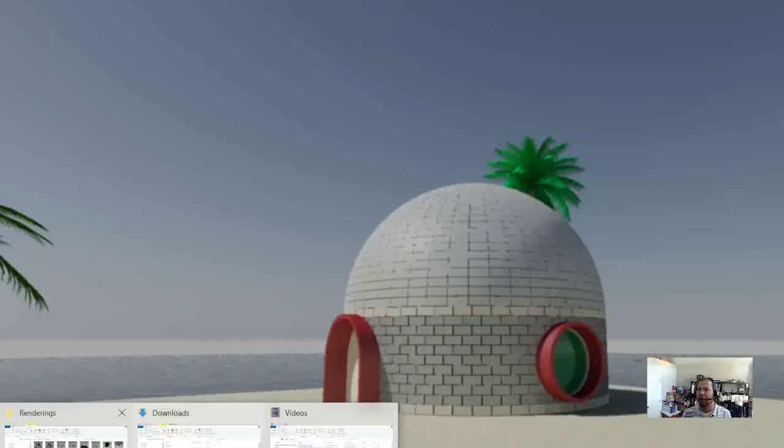heated or cooled air. It utilizes its environment to cool the inside when it's hot outside and warm the inside when it's cold outside. It uses the concept of convection through its design, which I will show you momentarily. First, to go into some of the reasoning why this is a good idea.

The shape of the dome, again, is among the strongest structures. Evidence for that is the shape of the human skull. The cranium is a dome structure which has evolved over millions of years to this shape because of its strength, durability, resilience, and ability to protect the inside.

This shape most likely evolved because of necessity through the millennia, and again, it is evidence, without going into too much detail, why this is an efficient shape when it comes to protection, when it comes to use of space, use of materials. It is the shape that uses the least material for the most amount of space for construction and living, dwelling.

And it is no surprise why it is all over nature. It is used throughout nature very many times, repeatedly. As we can see here, turtle shells also utilize the shape of a dome, again, for its protection, for its durability, and its strength to resist pressure from just about any angle.

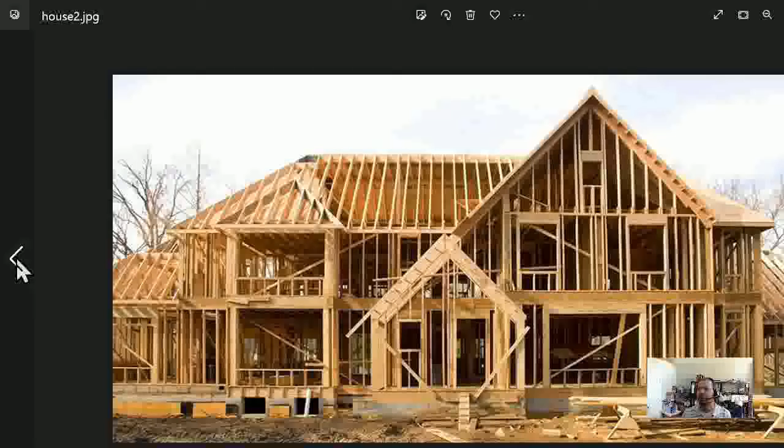And these shapes that you see here, this combination of shapes, are not the most resistant to pressures, and it is only a wonder why we so much use these shapes for home construction. The overwhelming amount of homes are constructed in these shapes and patterns.

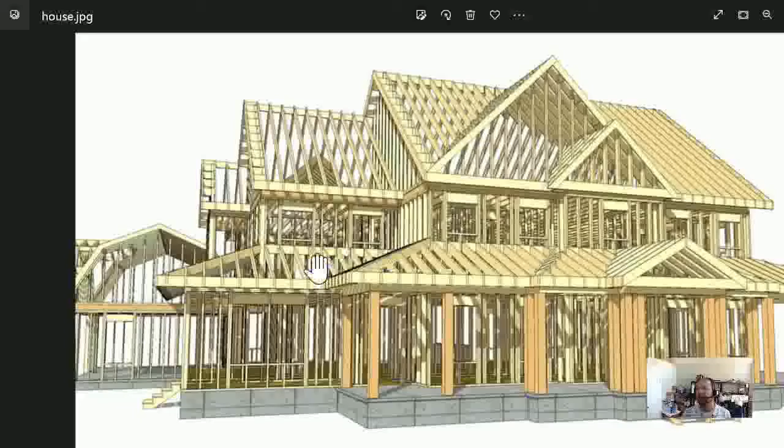And as you can see here, the amount of materials required to keep this frame erect and up is immense, and the cost for its construction reflects this amount of materials, time, and skill required. This is an example of a small frame for a conventional home. Again, even for a small home, you can see the large amount of materials required.

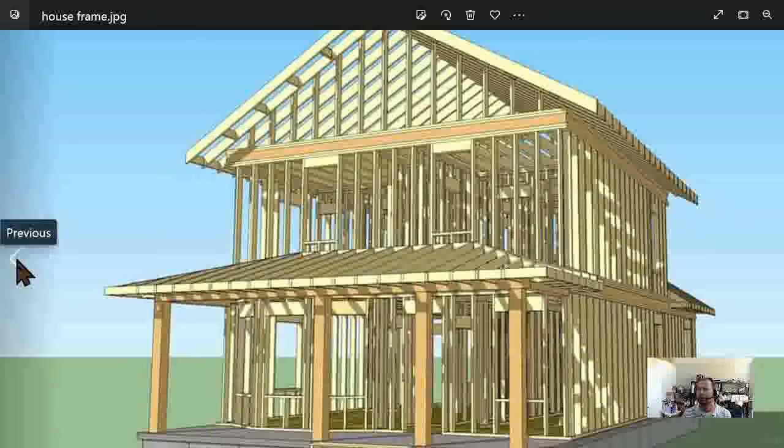A dome is a self-contained structure. It is a self-reliant structure, meaning that it stands on its own. It doesn't require internal columns or internal members to keep it up, to keep it in its shape. And that is why every hard hat is designed in such a way, using the dome shape, because of its ability to resist impacts and resist all kinds of pressures from just about all sides.

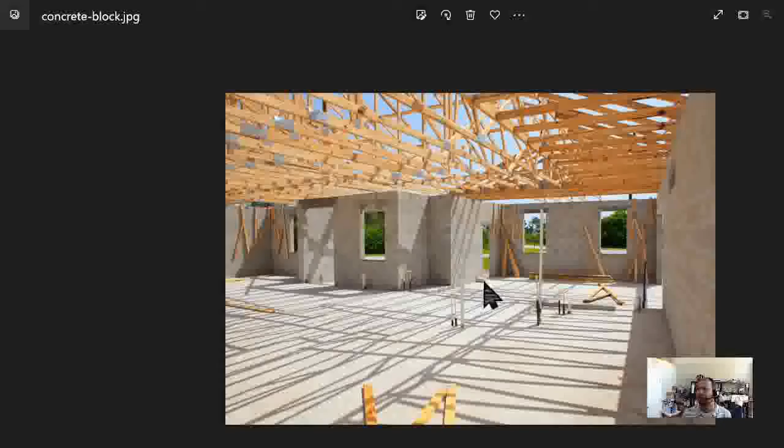This is again a conventional home construction. As you can see, it is using concrete blocks, and as you can see, the large amount of material used for the roof, because most roofs have to be in this shape for durability. Flat roofs are highly undesirable and expensive and require large amounts of steel members and trusses to keep them both from collapsing and straight without sag and stuff like that.

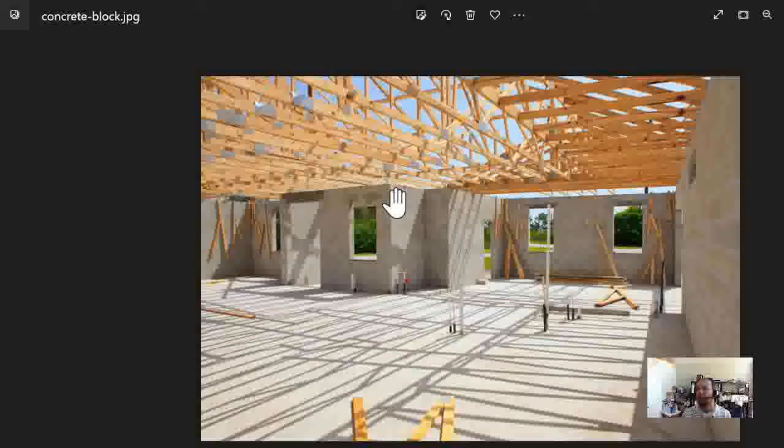So the large amount of triangles here are to keep the roof both straight and to keep it from collapsing. As you can see here, constructing even a small home like this one with concrete and blocks requires a large amount of not only skill and time, but materials as well.

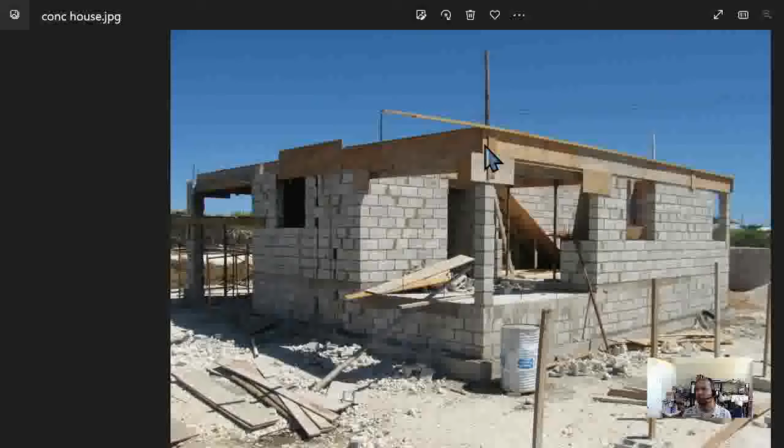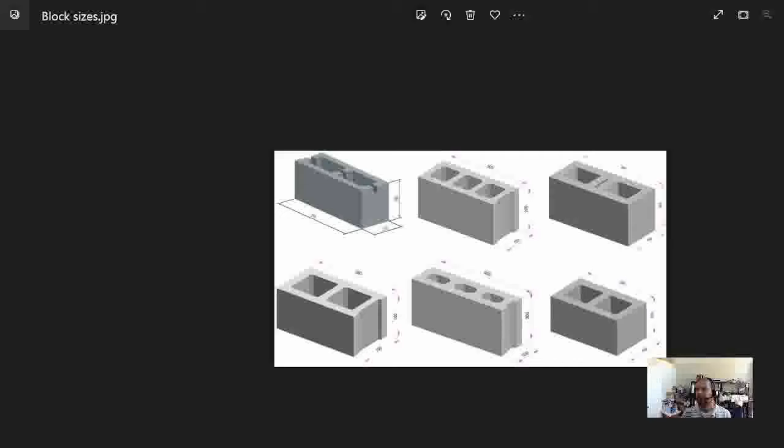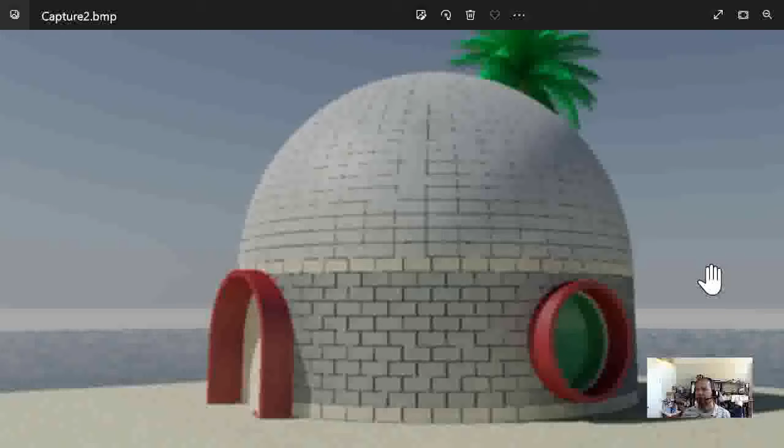These are the different block sizes. And again, the dome home is to be built with concrete, both poured and blocks. As you can see, it is a concrete block structure mainly, utilizing concrete block construction in a circular fashion with some poured concrete in some of its features like the door frame and window frames. And perhaps on the dome itself, there are some sections, as I have designed it, that will use poured concrete. This is a reinforced concrete or block concrete structure.

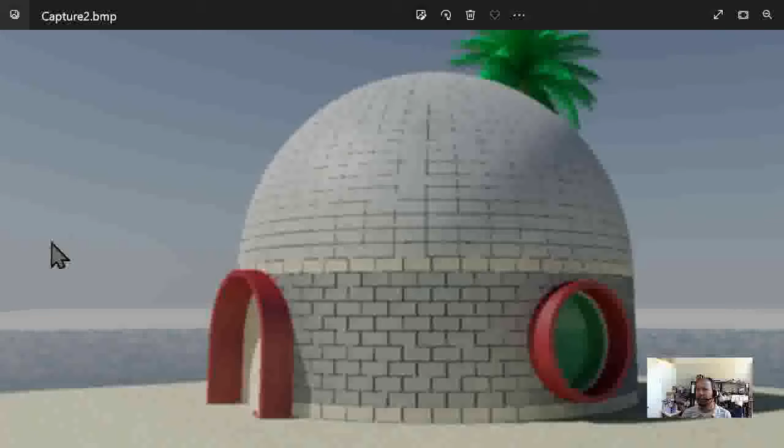It does utilize steel rebar or reinforcing bars of steel, but even those are a lot less than a conventional home would use. Again, this home does not require any interior supporting walls at all. If there are interior walls, they could be constructed of just about any other materials just for division, organization, or privacy. And with that, I will begin to show you the construction methods that I have come up with for the construction of this dome home.

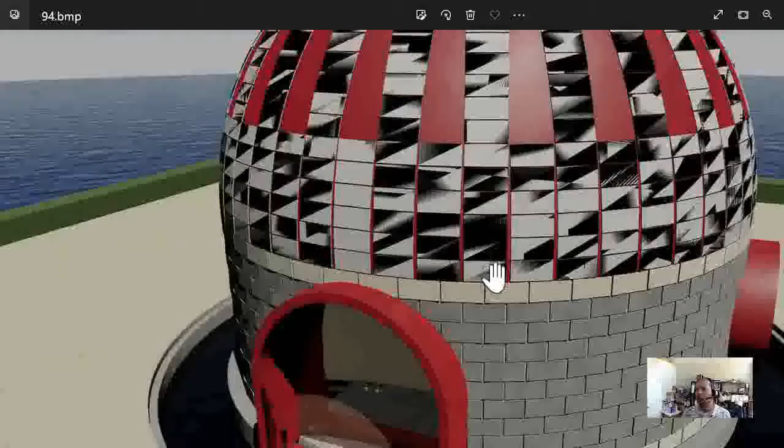Again, as you can see, it is designed to collect water. This is a water collection system, water reservoir system that I have come up with. Again, that will be collected through rainfall in this area. This is like a water reservoir pool, if you will, around the structure that will maintain water as long as it is not vaporized. And again, vaporization and exposure to radiation is a way to keep it clean. That is the radiation from the sun.

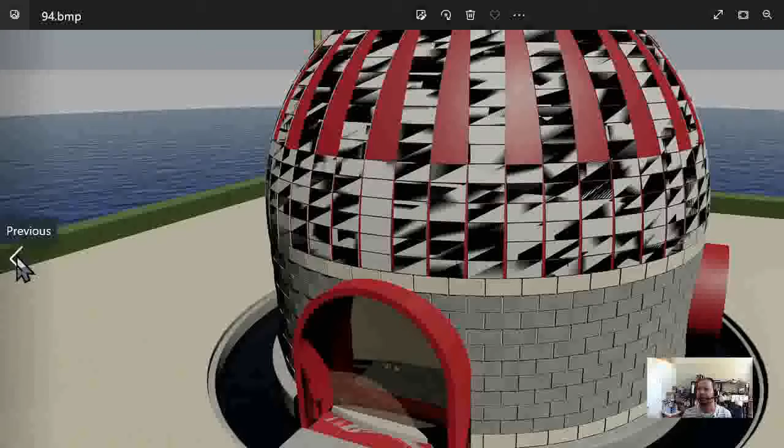This is another view of the concept of this dome home. As you can see, it is almost entirely built with concrete blocks. I have come up with this array, this circular array, that really does not require complex patterns of the blocks. This is a monolithic dome pattern for the structure. Monolithic domes have the advantage of simplicity, being a lot more simple than perhaps geodesic domes or other types of complex patterns.

For a dome, this is a pattern that keeps the arc patterns of each of these sections straight arcs, and as you can see, they don't reach all the way across because of the size of each block. These blocks are standard sized. I believe they are about 20 centimeters across, and they're all standard. All these blocks are the same size. And again, this is designed like that for simplicity. They are arranged exactly as they would be in real life.

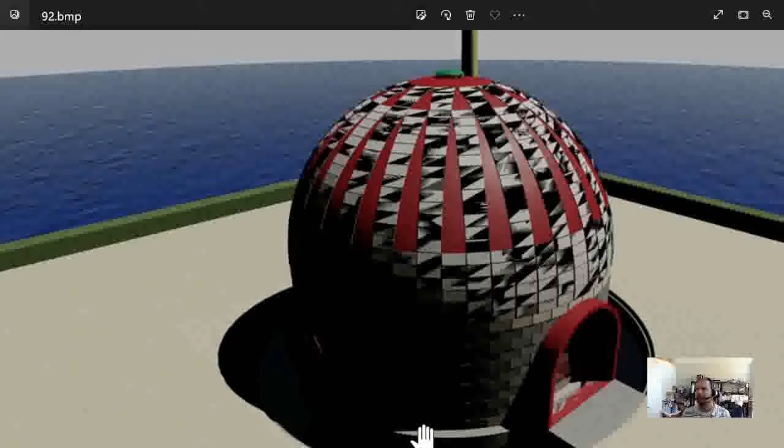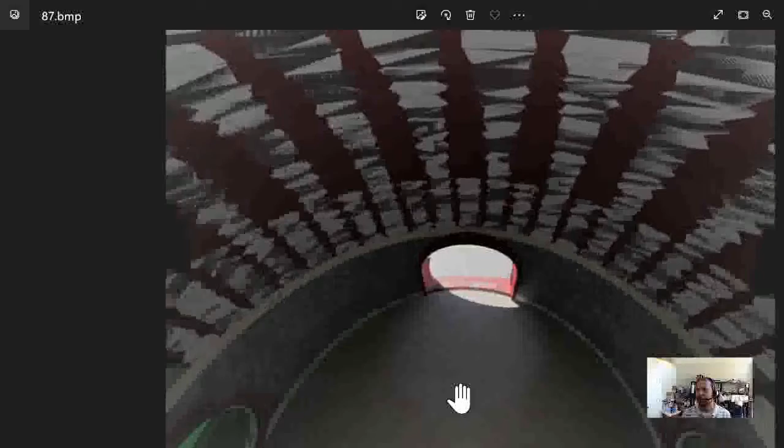This is another view of the structure. This is a view of the structure from the inside, as seen from the top inside, more or less a second level. This structure is designed to have the option to stack a second floor relatively easily with materials like steel or even wood. You can relatively easily build supporting walls and a second level here because it offers the height necessary for a second level.

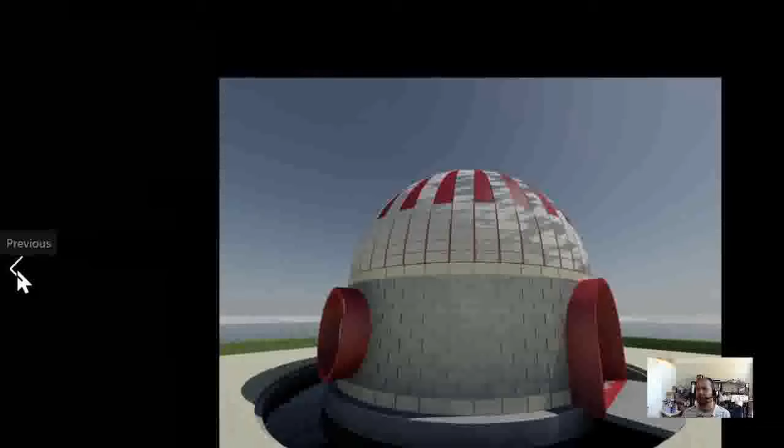And I will go into the details of the structure as I go along, as far as sizes, measurements, dimensions, etc. This is a rendering of the structure, quite nice rendering, and again showing the water reservoir. I designed the structure to have this water reservoir as optional. You can build it, of course, without it. You just will not have the capability to store water.

And I got away from using other materials such as in my other dome project because I realized that this is actually cheaper to build, stronger, simpler, and the materials for it are readily available in just about any part of the world. The materials are not exotic, not something that will be developed in the future, something that is conceptual or non-existent, something that's expensive.

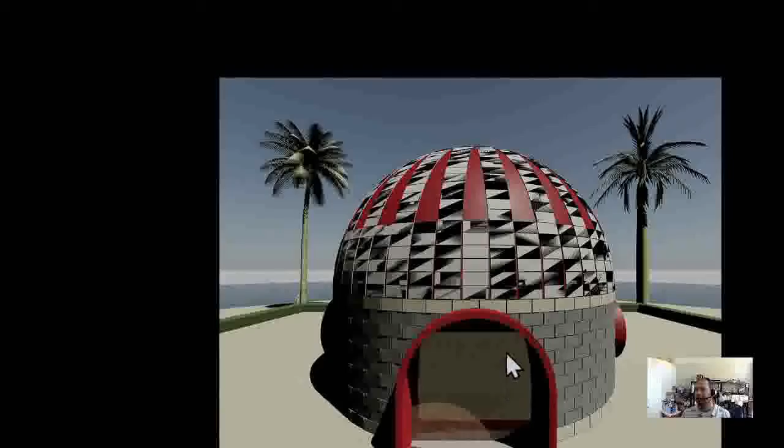This not necessarily has to be a pane. This could be window blinds made of materials such as, again, wood or aluminum or other kind of metal, like even steel. So it is a quite versatile design that could be changed and adjusted as the builder wishes.

This is a front view showing the very large arched doors. These doors are designed to be large on purpose for flexibility of bringing in materials, furniture, the flexibility of using the structure for just about any utility, such as even vehicle storage or any kind of other equipment storage. But it can easily be used for living as well, just as it is.

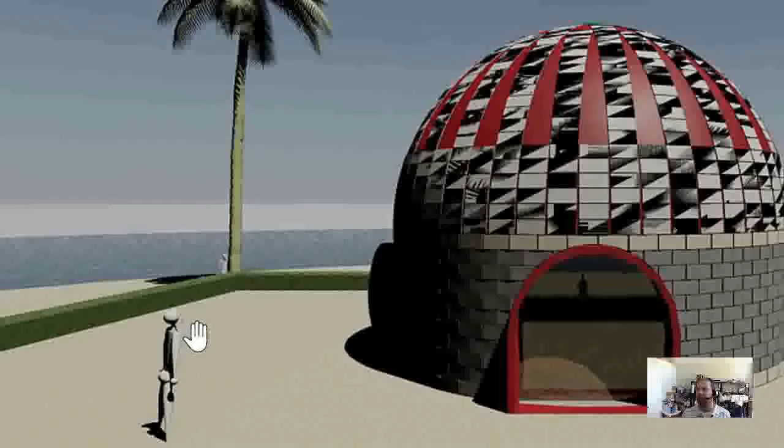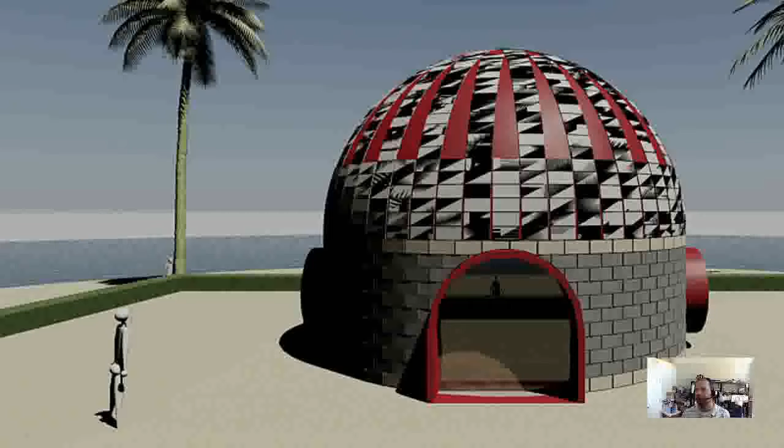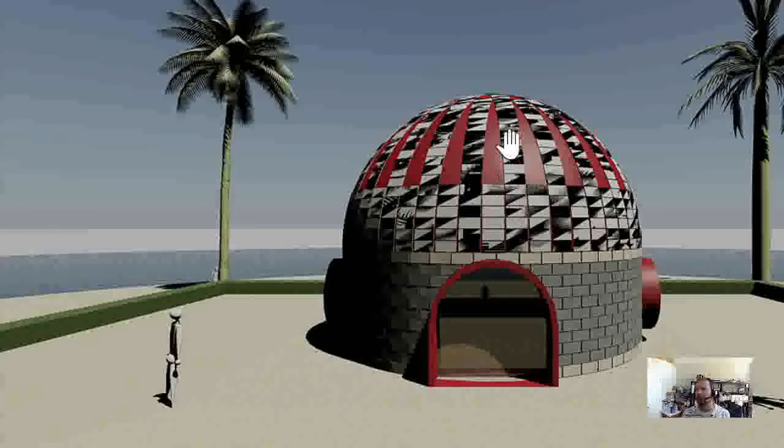This view shows you a few individuals of average heights, and it shows you a relative size of what the structure can be as designed. These individuals again are about 5'6" or 5'7". Again, average individuals, which just gives you an idea of the size of the structure. As you can see, it is a quite tall structure, giving you the ability to easily build a second level if you wished on the interior of the structure.

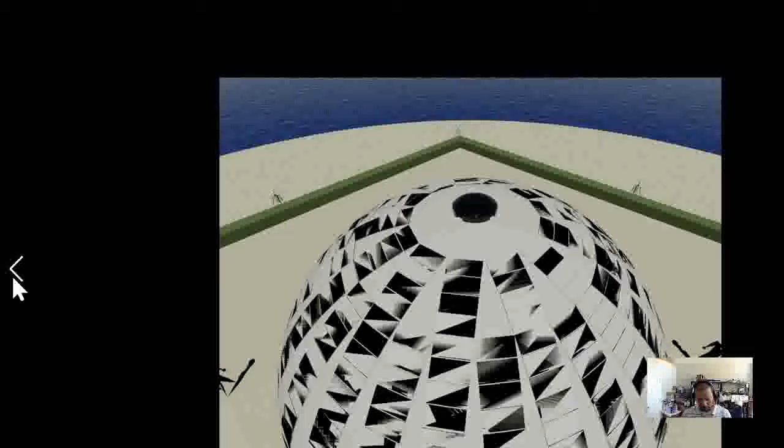This gives you an idea of the height of the structure again as looked from some distance. Again, that is an average sized individual. And that is the dome home, the structure that I have been designing. That is how it may look.

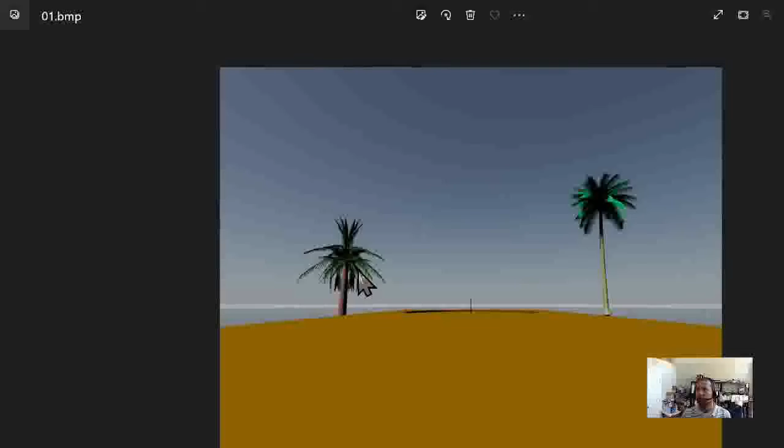So I'm going to introduce the building methods, which is almost as important as its design. The methods to build it. Again, the methods to build it are not the only ones, but I believe these are among the most optimal, among the most efficient, useful, practical methods, since I gave it quite a bit of thought as I was designing it.

As you can see here, this is a view of a scene of a patch of land, a section of land here that has been chosen or made to be a sort of hilltop. I put this structure on a hilltop purposefully to allow for rain to naturally run away from the center of the structure. This bar here depicts the center of the circular base of the structure.

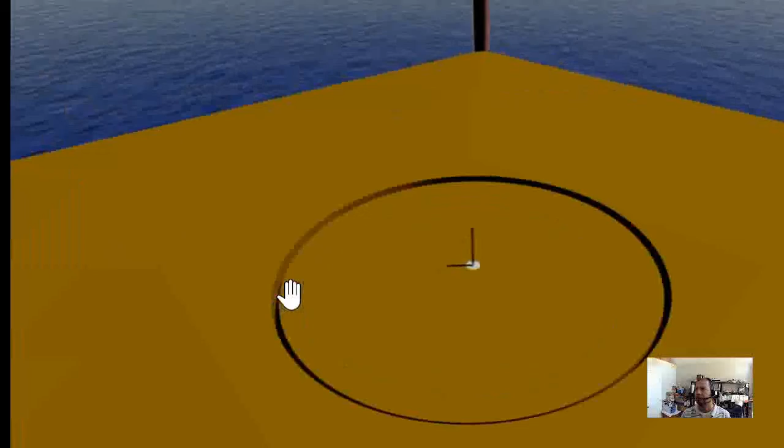Again, a little bit of a better view of the excavation here. Again, a circular excavation with this grade lower than that grade to allow for both the footing all around and the concrete slab. Again, the concrete slab will be reinforced with steel rebar.

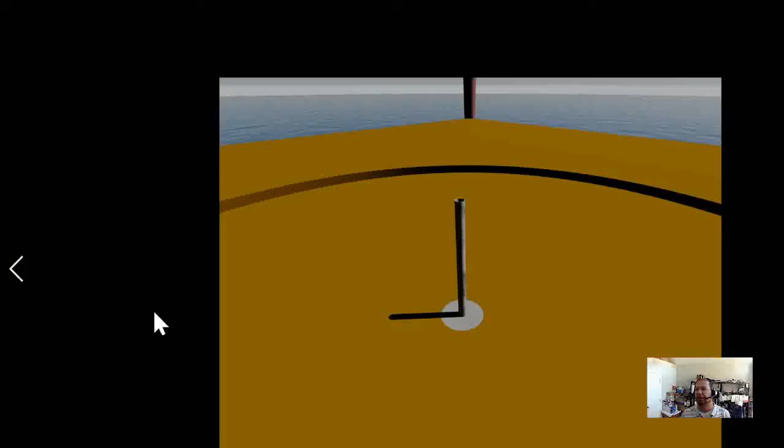This center tube, pipe, or bar, again, is in the absolute center of the excavation, and it is again about 200, 300 centimeters deep, and it is encased in concrete for stability, to keep this stable, because this will be used for the construction of the steel reinforced concrete slab.

And not only that, but this will be used for the construction of the walls, for the construction of the dome itself. So this has to be perfectly perpendicular with the ground. It should be as straight up as humanly possible, and it needs to be in the perfect center of this circle, because these again will be used for many other tasks which will require rotation.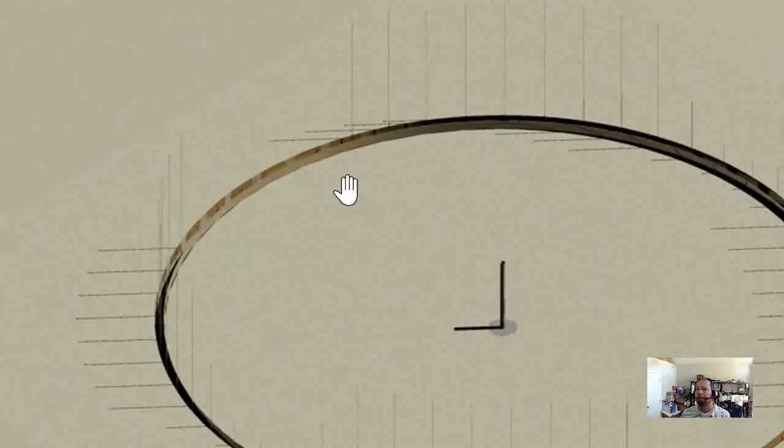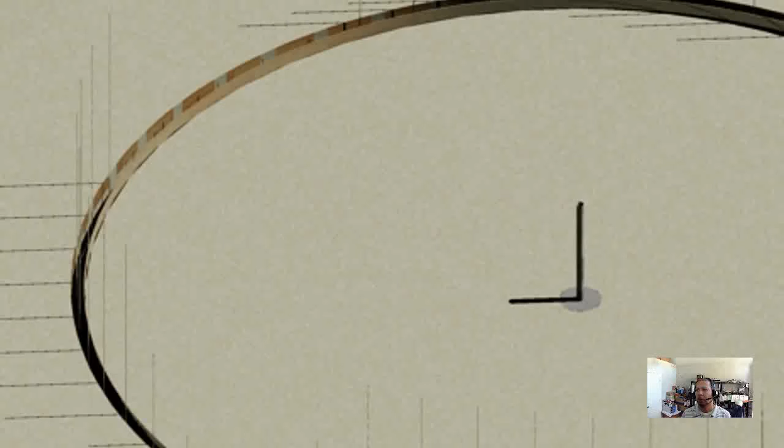So here we go. This is showing the same pattern, and I am here beginning to show the wood members that will be used to pour the footing, the circular footing. I am here also showing the steel bars or rebar that will be used all around the structure. These are again in a pattern that will match the concrete blocks. So of course the dimensions, the distance in between them, the placement of them, the height of each, the depth of each will be detailed in the construction drawings.

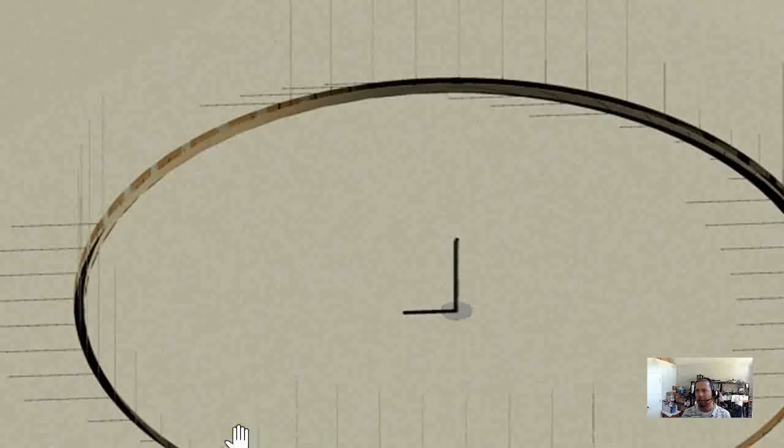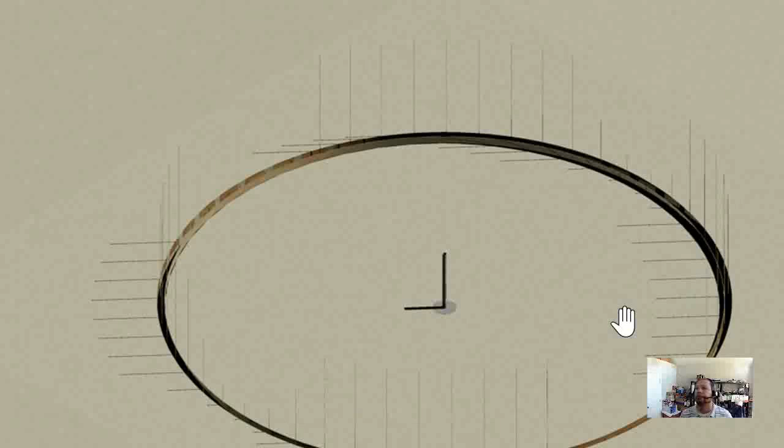As you can see, an arc here, pattern to allow for the windows, an opening here to allow for the doors. So this will all be shown in the construction documents. And as you can see, it is not many. This structure does not require a whole lot of rebar because of its inherent stability, strength, resilience, etc.

So this being the grade, for pouring concrete, I show here the wood placed in a circular pattern all around to keep the circular shape when the concrete is poured. This is just getting ready for concrete to be poured inside here. Again, showing the center column bar.

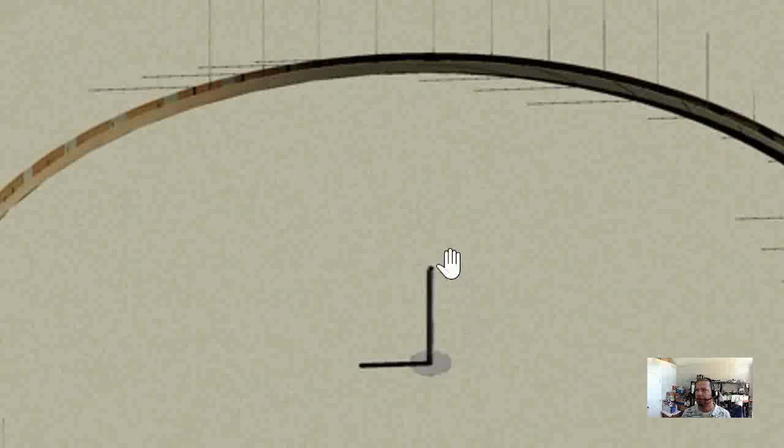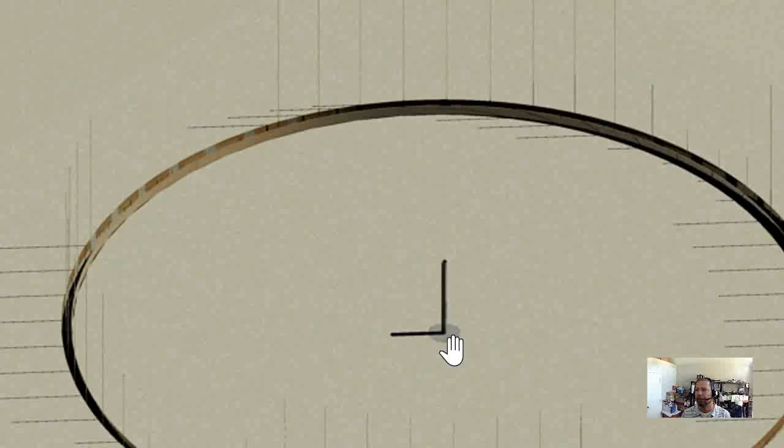This bar is to be made of a non-corrosive material, perhaps high grade PVC, schedule 80 or better, or it could be steel, it could be a metal, as long as it is coated for non-corrosion. But it has to be very straight, as straight as possible, and very durable. And the dimensions for it, the size, again, is detailed in the construction drawings.

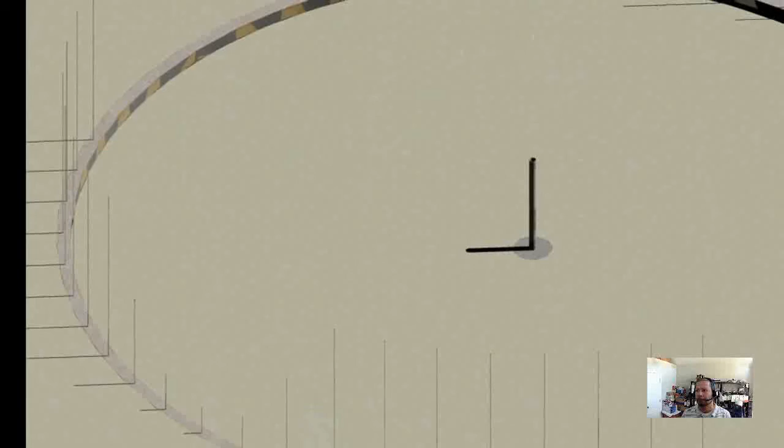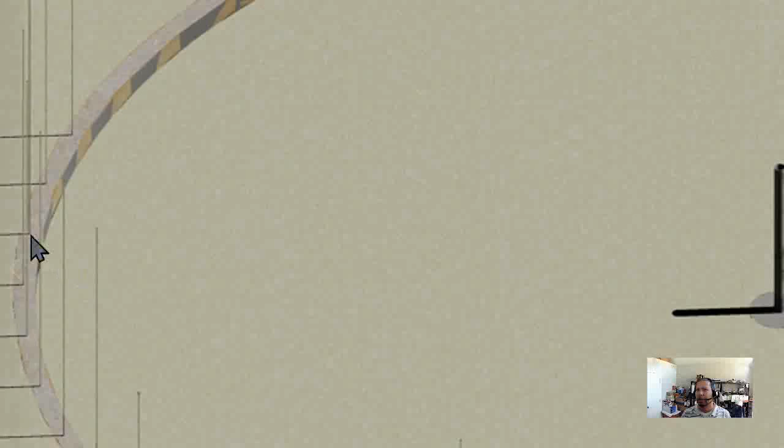This is another view of that, and this is a view of the concrete footing poured already. As you can see, the grade is here in line with the footing, and this is the footing with the steel reinforcement shown. You want this to be as smooth and as straight as possible, because this will be used as a guide, a track, a rail if you will, to pour and smooth and to level your floor.

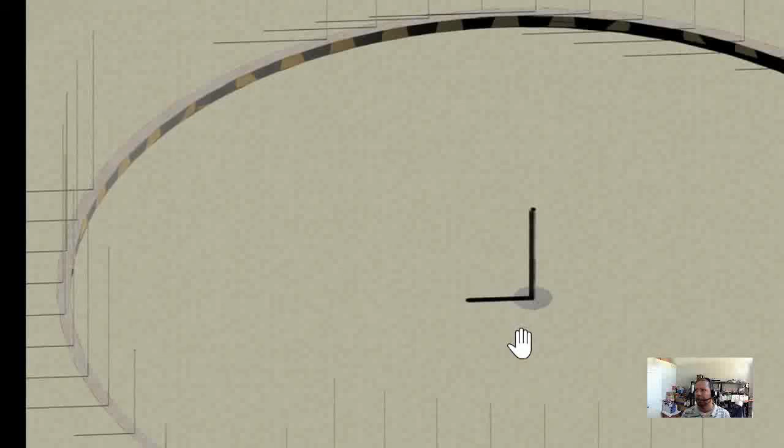The concrete floor slab will be in line with this, so you want this to be as straight and smooth as possible, which is not that difficult to do given the guide wood panels here. So a lot of care is to be taken for this structure to be made as straight as possible, because this again will aid in the construction of the floor slab and will make it a lot easier than a conventional squared floor, which you have to level so much. You have to level, and many times it's not really level because of the construction methods used.

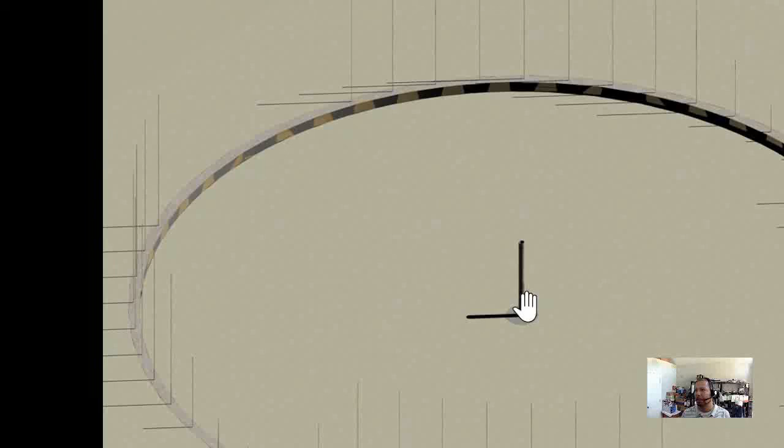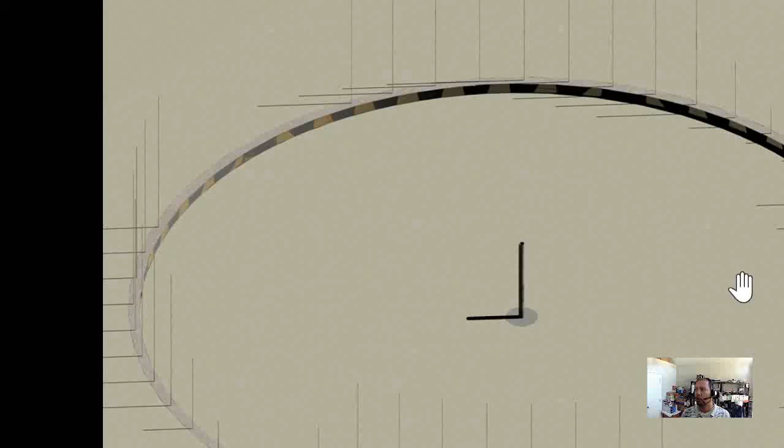There's a lot of eyeballing and guessing and just making it as straight as possible. But with this method right here, this center will be used as a guide, and the outside is also used as a guide, so it is very accurate to have a very straight, very level floor, which is your foundation, which is basically what's going to determine how straight and how strong and durable your structure will be in the end.